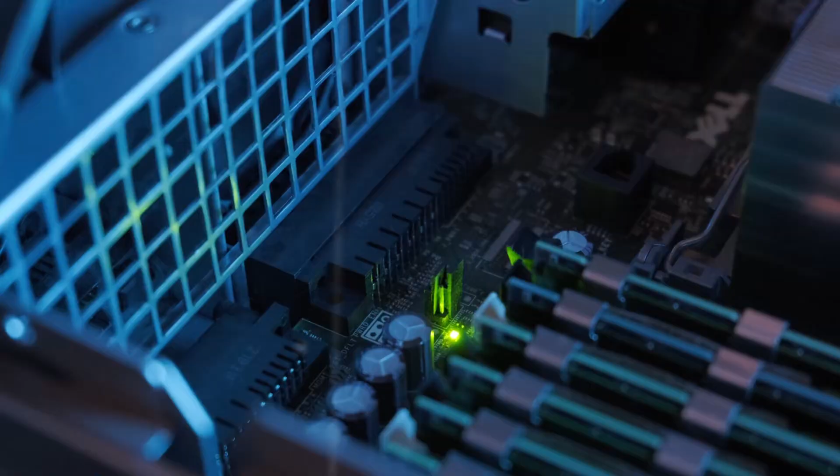The enormous facilities have become the backbone of the digital economy, processing billions of requests every second. For years, their growing appetite for electricity was manageable. But then artificial intelligence changed everything.

Training advanced AI models and running millions of AI-powered applications requires an astonishing amount of computing power. As companies build larger data centers to support this demand, they're running into an unexpected problem: finding enough reliable electricity to keep them running. Some experts believe the next breakthrough in artificial intelligence won't depend on better algorithms or faster chips. It may depend on something much less glamorous: where the electricity comes from.

Surprisingly, one of the strongest candidates isn't a brand new technology at all. It's nuclear energy. For decades, nuclear power has generated electricity for entire cities. Yet today it's finding a new purpose: powering the world's rapidly expanding digital infrastructure. Major technology companies are exploring nuclear energy not because it's futuristic, but because the scale of AI is pushing traditional power systems to their limits.

To understand why this matters, we first need to understand how much energy modern data centers actually consume. A typical office building uses electricity for lighting, air conditioning, computers, and basic equipment. A modern data center does all of that while also operating tens of thousands of powerful servers 24 hours a day. Every search query, video stream, online purchase, AI request, and cloud backup depends on these machines continuously processing information. The more AI becomes part of everyday life, the more servers companies need to deploy.

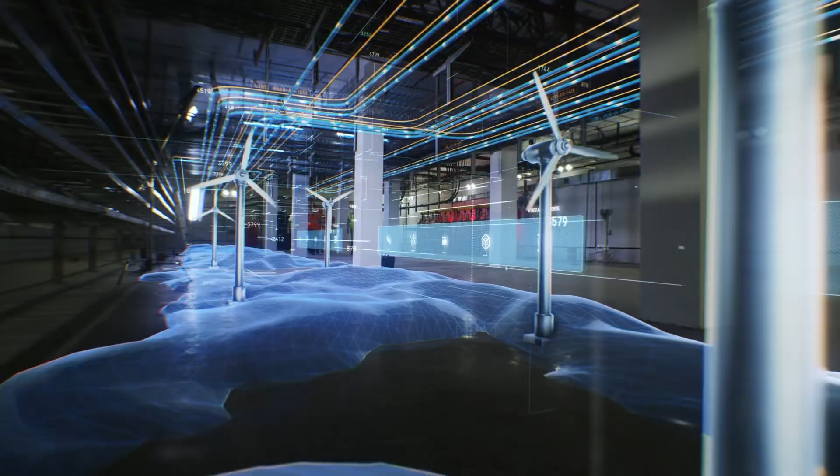Building larger facilities isn't the difficult part. Supplying them with consistent, uninterrupted electricity is. Data centers cannot simply shut down when renewable energy production decreases or when demand on the electrical grid spikes. Even a brief power interruption can disrupt online services used by millions of people around the world. That's why operators require energy sources capable of delivering stable electricity every hour of every day.

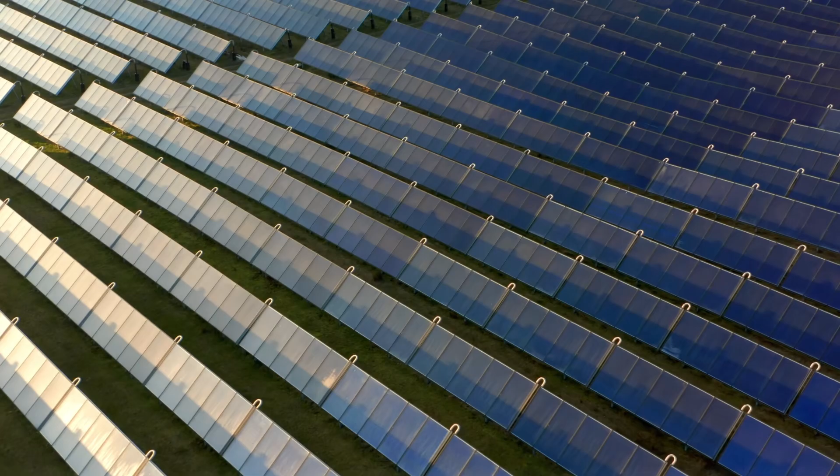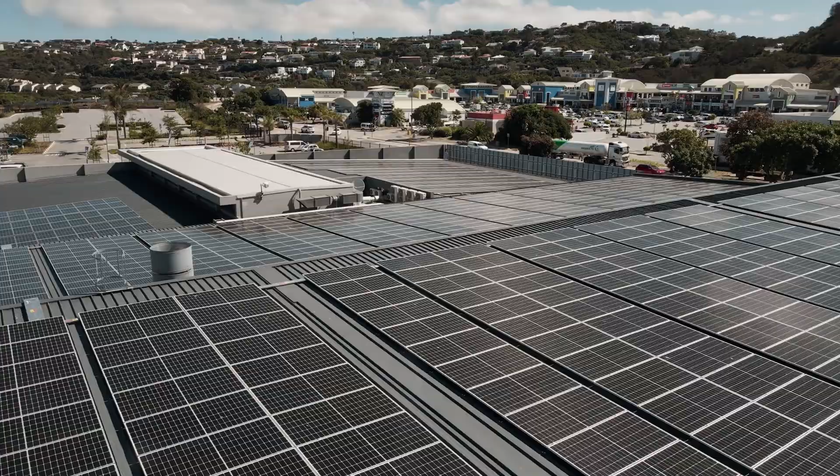Renewable energy plays an increasingly important role in reducing carbon emissions, but solar panels only generate electricity during daylight hours, and wind farms depend on weather conditions. Batteries can help smooth short-term fluctuations, yet storing enough electricity to power massive AI facilities for extended periods remains expensive and technically challenging. This is where nuclear energy enters the conversation.

Unlike many renewable sources, nuclear power plants produce steady electricity regardless of weather or time of day. They can operate continuously for long periods while generating large amounts of power with virtually no direct carbon emissions during operation. For technology companies investing billions of dollars into AI infrastructure, that reliability is extremely valuable. Instead of relying on multiple backup systems and unpredictable energy supplies, a nearby nuclear facility could provide a consistent source of electricity capable of supporting high-performance computing around the clock.

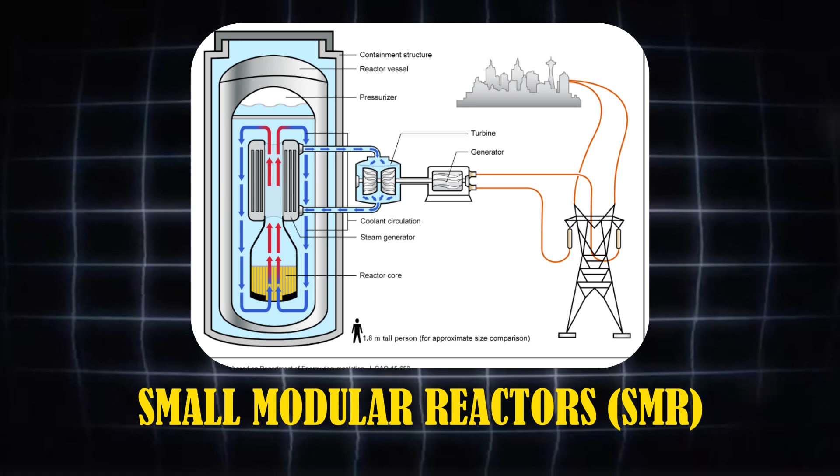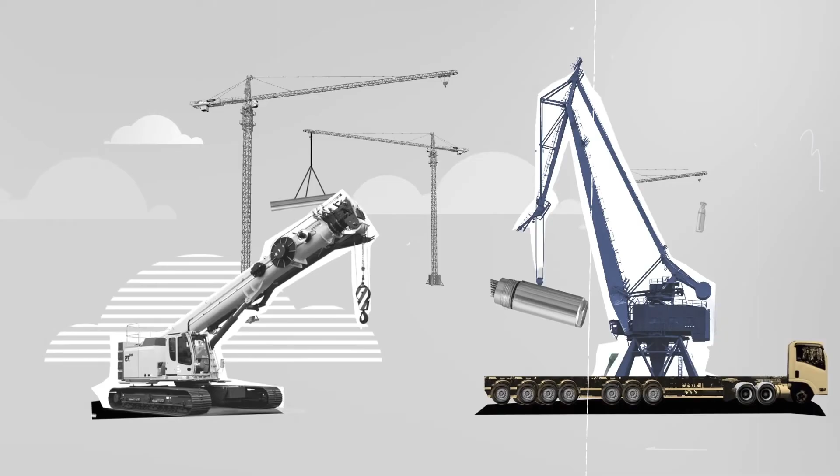What's even more interesting is that the industry isn't only looking at traditional nuclear plants. Researchers and energy companies are developing small modular reactors, often called SMRs. Unlike conventional reactors that require massive construction projects, SMRs are designed to be smaller, factory-built, and easier to deploy. While still an emerging technology, many experts believe they could eventually supply dedicated power to industrial facilities, manufacturing plants, and even large data centers. If successful, these reactors could allow future AI campuses to generate reliable electricity much closer to where it's actually needed. That reduces strain on national power grids while improving energy security for critical digital infrastructure.

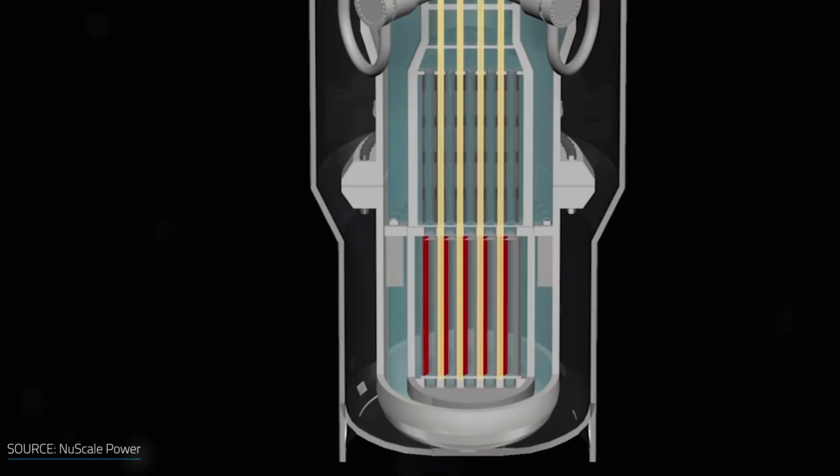The growing interest in nuclear-powered data centers also reflects a broader shift in how technology companies think about energy. In the past, electricity was simply another operating expense. Today it's becoming a strategic resource. Access to abundant, reliable power may determine where future AI facilities are built, how quickly companies can expand, and how competitive they remain in the global technology race.

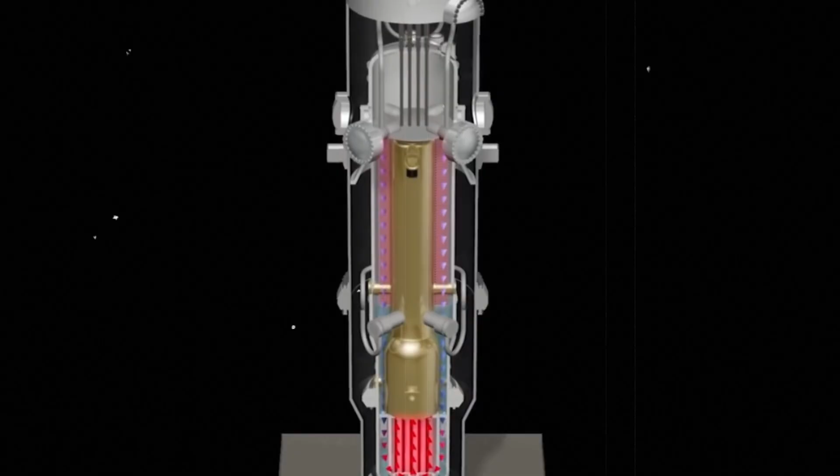Several major technology companies have already announced partnerships, investments, or long-term agreements related to nuclear energy as they prepare for rapidly increasing electricity demand. Rather than viewing energy and computing as separate industries, they're beginning to treat them as deeply interconnected.

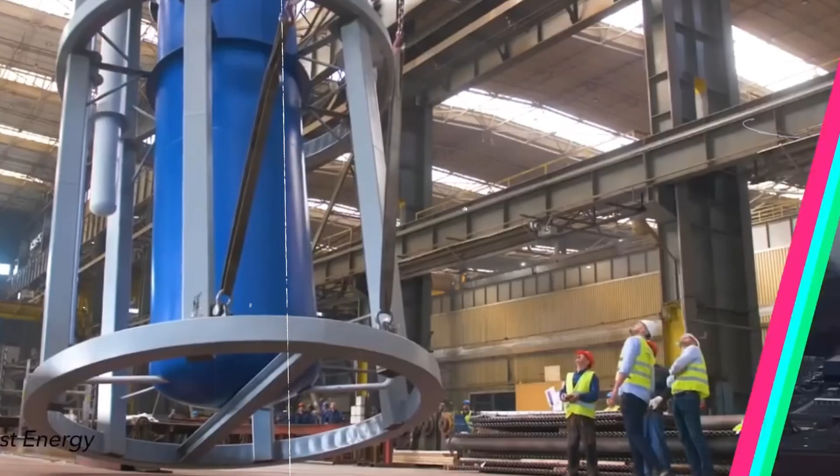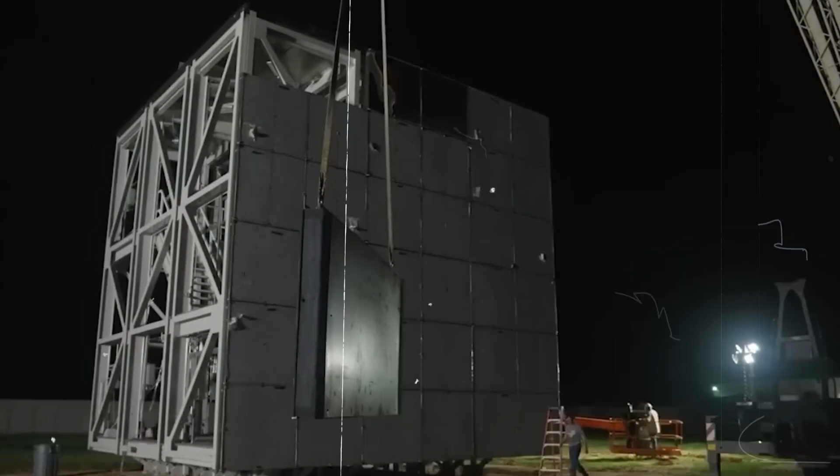Of course, nuclear energy remains one of the most debated technologies in the world. Supporters point to its reliability, low operational carbon emissions, and ability to generate enormous amounts of electricity from relatively small amounts of fuel. Critics raise concerns about radioactive waste, high construction costs, long development timelines, and public safety.

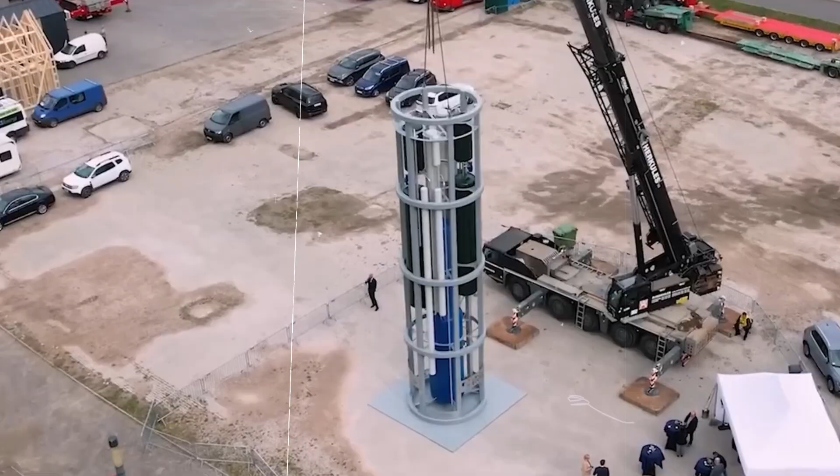Modern reactor designs are addressing many of these concerns through improved safety systems, passive cooling technologies, and stricter engineering standards. While no energy source is completely without trade-offs, advances in reactor technology are encouraging governments and private companies to reconsider nuclear power as part of the future energy mix.

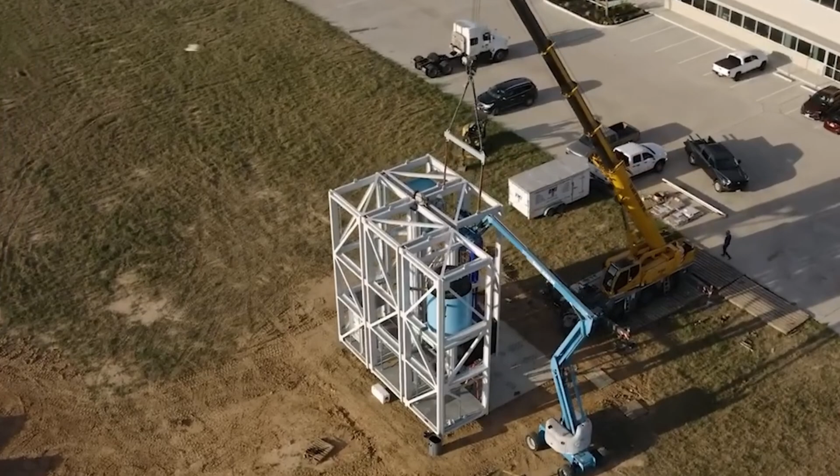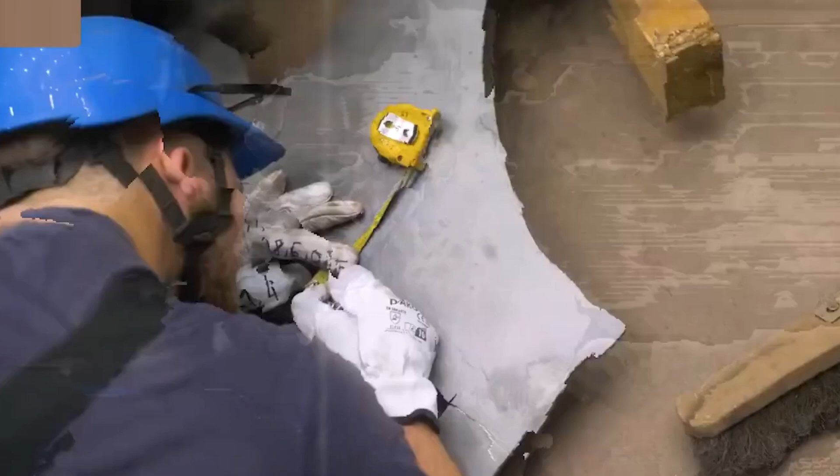As artificial intelligence continues to expand, the question is no longer whether data centers will need more electricity. They absolutely will. The real challenge is finding energy sources that are reliable, scalable, and capable of supporting the next generation of computing without overwhelming existing power infrastructure.

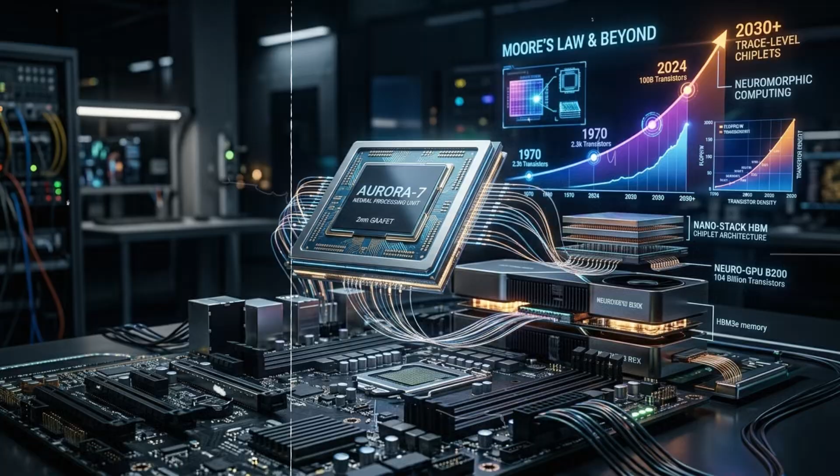Artificial intelligence is growing faster than almost anyone predicted, and every new breakthrough increases the demand for computing power. As companies build larger AI models and expand cloud services, energy is becoming one of the industry's biggest competitive advantages. The future of technology may depend not only on better processors, but also on who can provide enough electricity to keep them running.

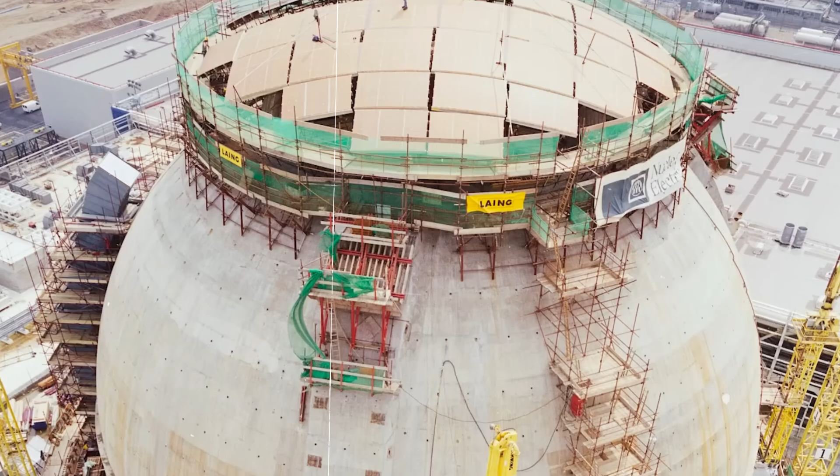That doesn't mean every data center will soon have its own nuclear reactor. Different regions will continue to rely on different energy mixes, including solar, wind, hydroelectric power, natural gas, and nuclear energy. The most resilient infrastructure will likely combine multiple energy sources to ensure both reliability and sustainability.

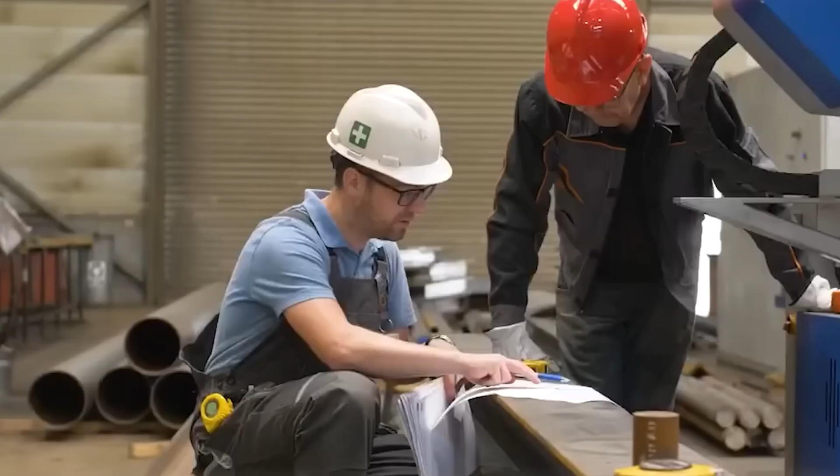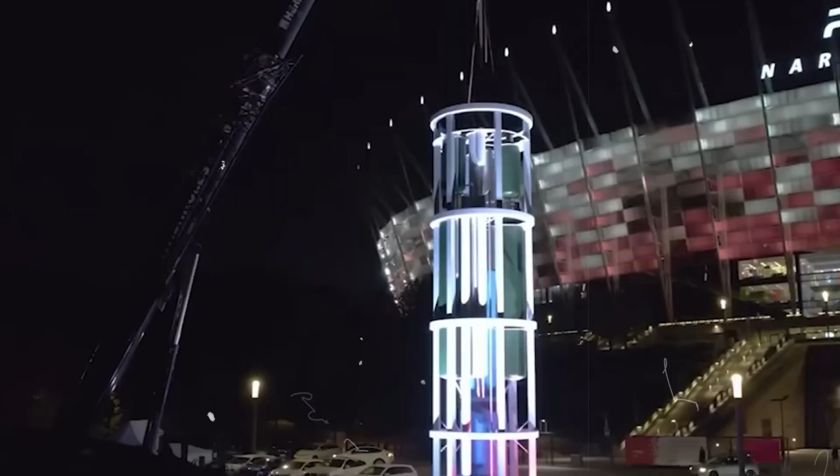Small modular reactors could play an important role in that future if they prove commercially successful. Their compact design and scalable construction make them attractive for industries that require continuous power, but widespread adoption will depend on regulatory approval, public acceptance, and economic viability. Many projects are still in development, meaning it will take time before their full impact becomes clear.

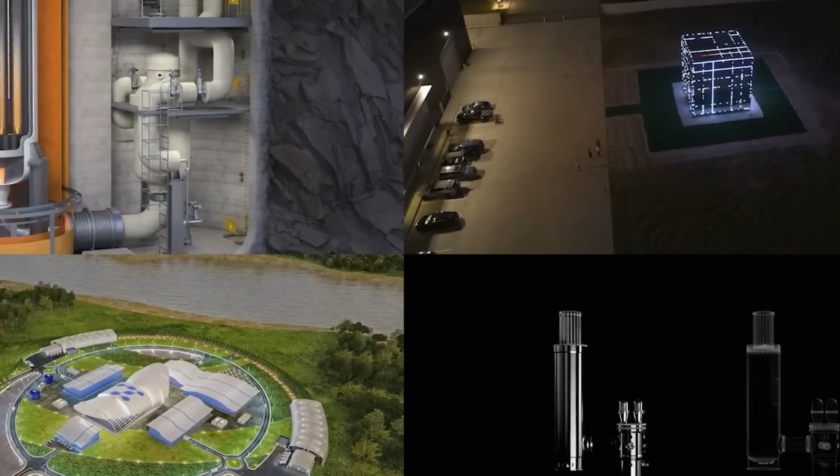Regardless of which technologies ultimately succeed, one thing is certain: the relationship between energy and computing has fundamentally changed. Data centers are no longer just buildings filled with servers. They're becoming some of the largest electricity consumers in the modern economy. As AI continues to transform industries, powering these facilities efficiently will become just as important as designing faster chips or smarter algorithms.

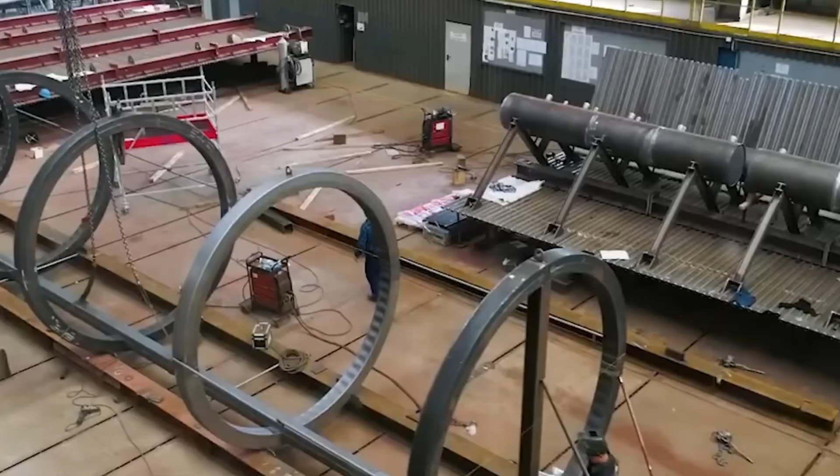History has shown that every technological revolution depends on infrastructure. The Industrial Revolution relied on coal and steam, the Internet relied on global fiber optic networks, and the mobile era depended on wireless communication. The AI revolution will depend on something equally essential: reliable, large-scale energy.

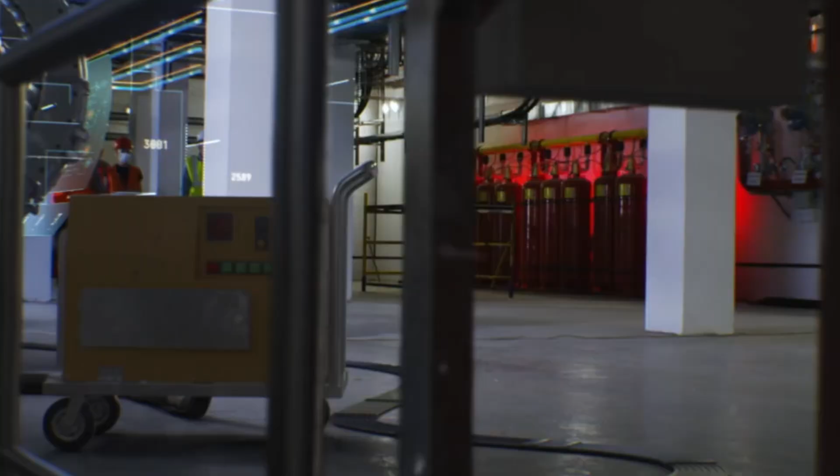Nuclear-powered data centers represent more than just a new engineering idea. They symbolize a future where computing and energy evolve together, ensuring that artificial intelligence has the stable foundation it needs to keep advancing. In the years ahead, the companies that solve the energy challenge most effectively may become the leaders of the AI era. Computing power alone won't be enough if the electricity to support it isn't available.

As digital infrastructure continues to expand, energy will no longer be just a utility, it will become one of the world's most valuable technological assets.